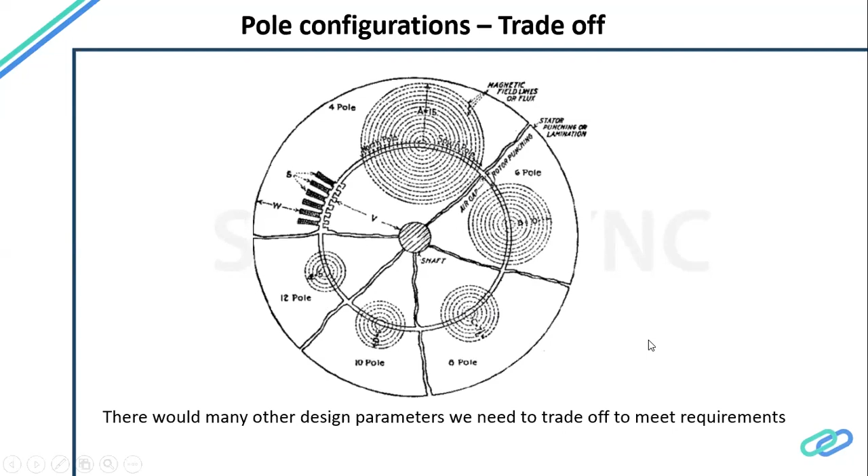This is another area: 6 pole, 8 pole. There are a lot of debates on 10 pole versus 6 pole versus 8 pole. Mostly you will see a machine will be either 6, 8, or 10 pole, because they fall in a sweet spot, or a golden mean area where the switching frequencies and the size of the machine, the OD of the machine, shrinks as I increase the poles. This is a flux return path where you don't need so much steel on the outer, because the conduction is only on a smaller portion of it. So these are all the trade-offs, the design choices, that we have to ultimately make.

IPM, I'm considering IPM as a key player in this, so I'm just trying to focus here a little bit. This is very much famous, especially the interior permanent magnet, because of the saliency that it gives.

If you see the inductance of these two paths, called the D and Q axis, these two paths give different inductances to the flux, so the flux paths are like this. Whereas if you see the surface mount permanent magnet machine, they are pretty close - the inductance of D and the inductance of Q are almost the same, because permanent magnet permeability is close to air. So it sees almost LD equal to LQ.

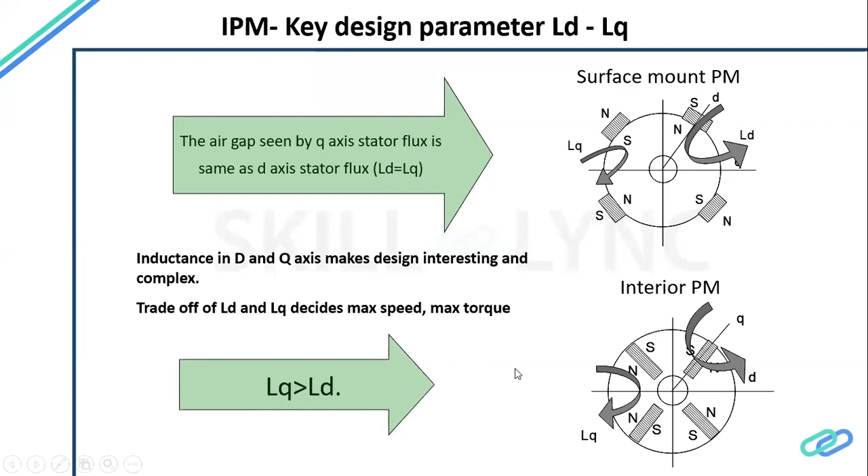But the real advantage of having this saliency, or non-equality of LD and LQ, gives additional torque, a surplus torque - that's the two parts, the reluctance torque and the synchronous torque. The reluctance torque comes from the difference between LD and LQ, and that is where it becomes a more torque-dense design. So the torque density, if you compare with induction, this gives a very good amount of torque as compared to the given space, volume, and weight.

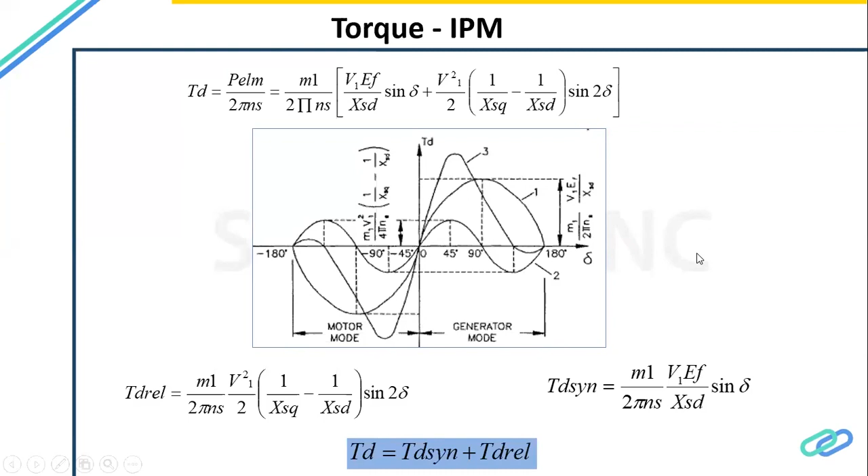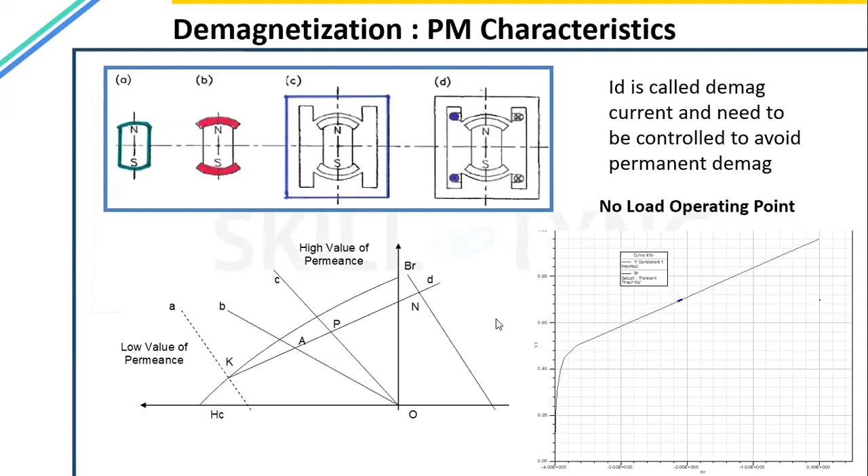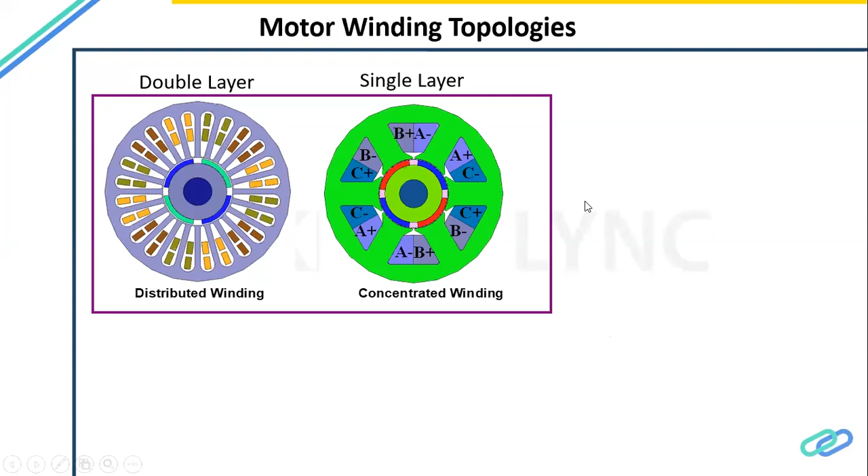Another thing is what kind of winding we should use - single layer, double layer, concentrated, distributed. There are many options available that we have to consider in machine design. The another trending winding is hairpin, where we have better thermal management, manufacturability, better winding factor, space factor - better utilization of space, and much higher fill factor.

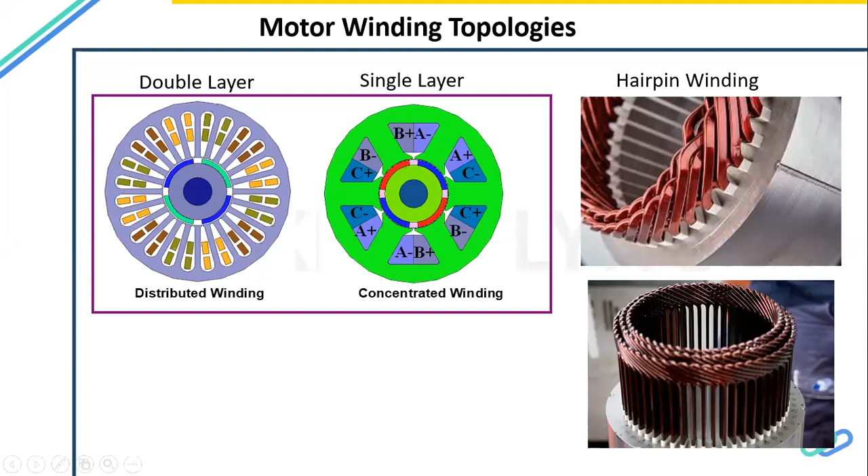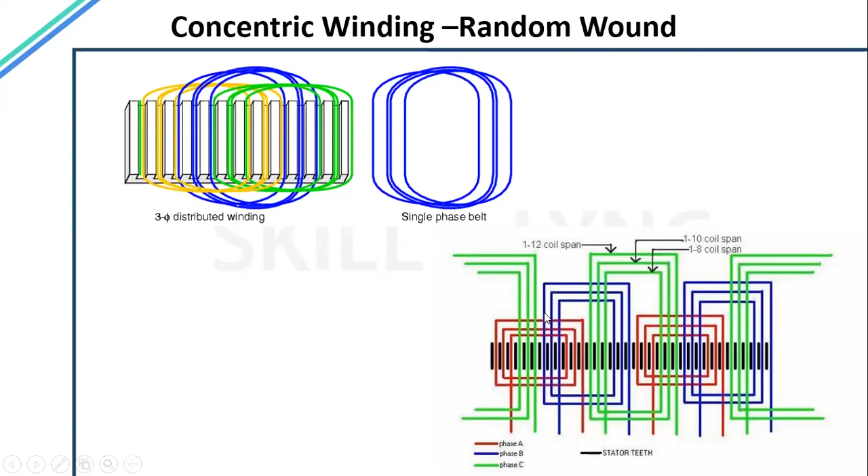We call this a random winding, this usual conventional type, versus a hairpin winding. It gives a lot of benefits, but it can be expensive if we don't have enough volume to handle this. If you see this kind of typical conventional winding, they are wound like this - the three-phase distribution typical. They are wound with different topologies like overlap winding, non-overlap winding, or alternate tooth winding.

There are different fractional slot windings available. We'll run through when we should have fractional slot winding, when we should select which winding, which windings are more appropriate for a particular application. These are all the options, or what I'm trying to project here is the whole design space available for us, the parameters we can play with when we design.

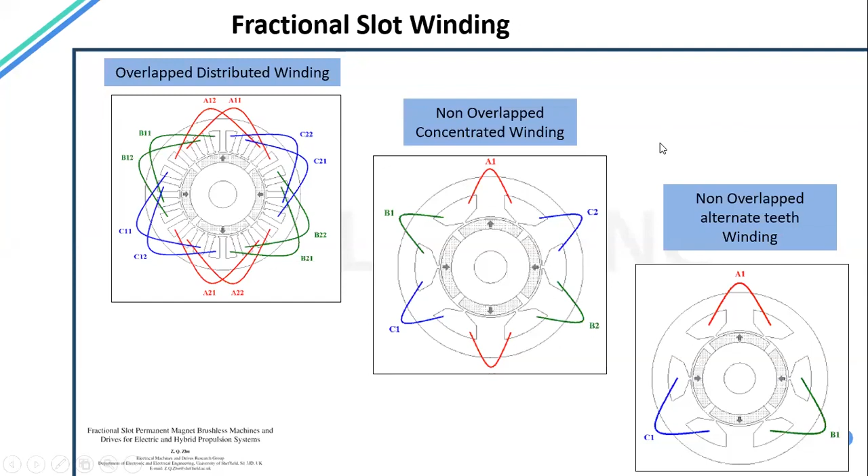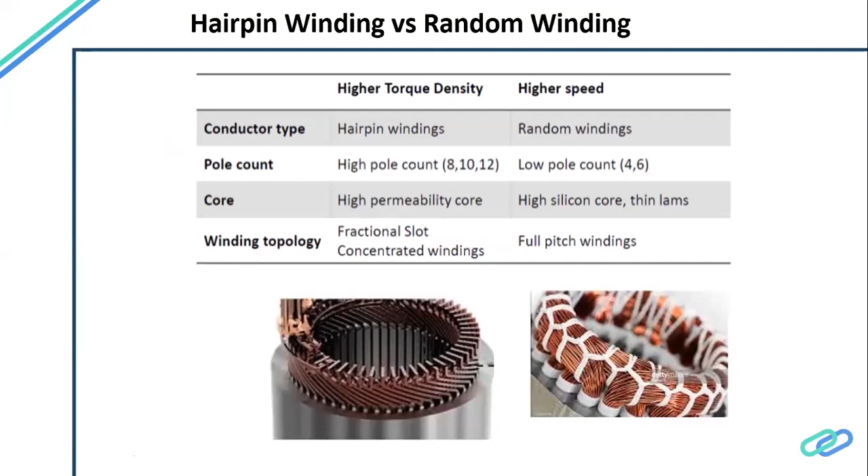So hairpin winding versus conventional winding: they give us very good torque density and very good thermal performance. Right now they are predominantly used in research, and that's where the market is going. There is very small volume currently, but we can definitely switch from one winding to another, back and forth. We'd have to redesign those, but thermally it is better to manage this kind of winding than random windings. We will take this up as a topic for further detailed discussion.

The other thing is harmonics, right? Once we have the magnets and windings selected, there's the air gap that we have.

The... hello? Sorry sir, sorry for the interruption sir.

No problem. So harmonics are a very key element, and personally I would push this as a key element that we always have to consider at various design phases. These harmonics either come from the inverter or from the design of the electric machine itself: the number of poles selected, number of slots selected, the winding topology selected, the way we have laid out our permanent magnets. All these geometry elements play an important role, because they will reduce our efficiency and reduce our torque, since they are all unintended.

So the fundamental is what we want. All the remaining harmonics contribute to losses, and those are very detrimental to the whole electric drive, or the vehicle as such, because there will be EMI/EMC issues. There are many bad effects of these harmonics, so we have to reduce all these impacts, or eliminate a few of them.

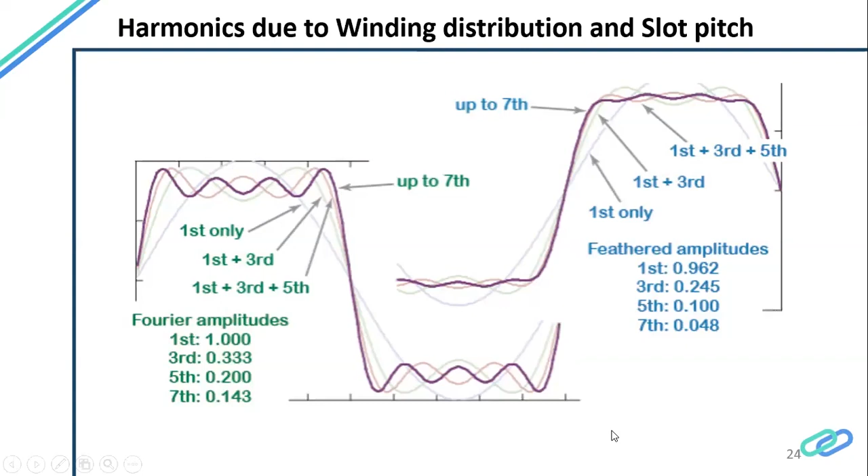So another element is... I think somebody is asking -- please don't ask me right now about the control, let me use the control. So there's the conventional wave winding, and there is some special winding here.

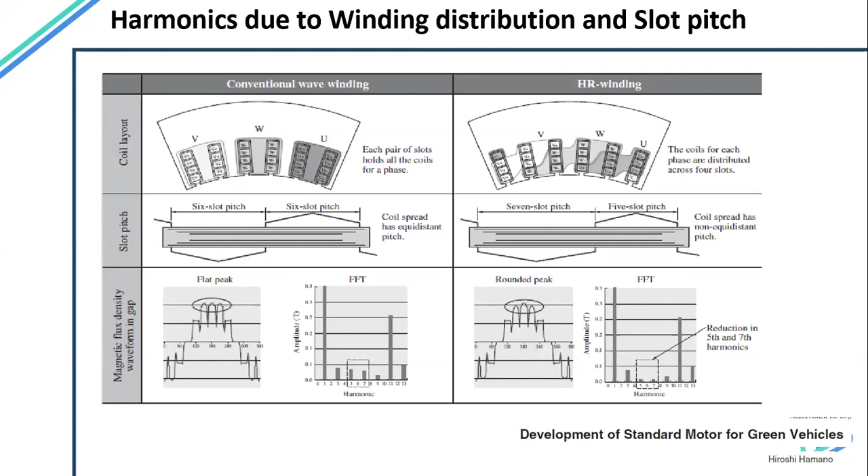You can see, if you do the FFT on this air gap flux density, some harmonics are reduced. If you compare these two harmonics here, you can see they're different -- the winding patterns give us reduction or elimination of harmonics, and this is where we will be focusing most of our time in our design.

The losses that any machine has can be categorized by and large into three to four areas: stator, rotor, friction/windage, and some shaft and housing losses. Mainly copper loss -- the predominant is copper loss, I-square-R loss -- and the iron loss.

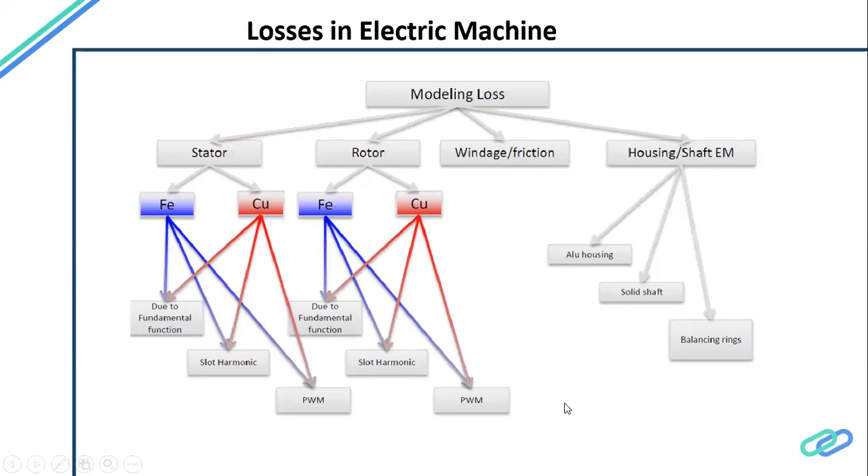These losses we need to keep in control when we design, especially when using PWM techniques. We have to be very careful what kind of other harmonics are getting injected into the machine, because they either produce negative torque, or produce I-square-R loss, or increase iron losses, since iron losses are very much driven by the frequencies we have. Higher harmonics, higher frequencies, and those losses will get impacted. So harmonics are at center stage when we talk about this.

If you switch from looking at losses to the efficiency side, it would look like this -- this is where designers, or whoever is using the machine, will be keen to look into this efficiency map, so called. This is torque, speed, and efficiency, and the challenge is where to optimize this machine in this area. As I mentioned, whatever the driving cycle requirements are, those are the elements we have to consider. This is the ideal I showed earlier, and this is something you may actually get when you test or simulate the machine.

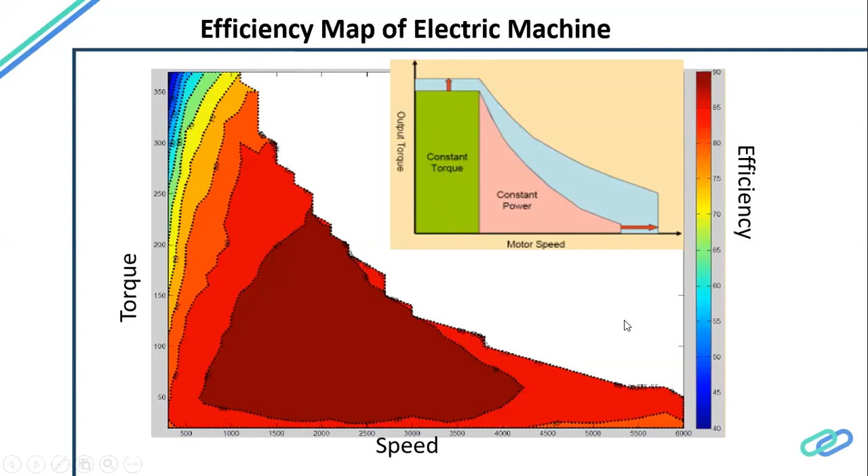Coming to the voltage perspective, here I have considered a 400-volt system. You can consider a 48-volt system, 60-volt system, 70-volt system, whatever, but there will be one range where it is fully operational, and there are some voltages where the machine won't work, or even the inverter won't work. We call those voltage stack-up studies, where we have to see which component supports the lower voltages -- whether it's the machine, the inverter, or the battery.

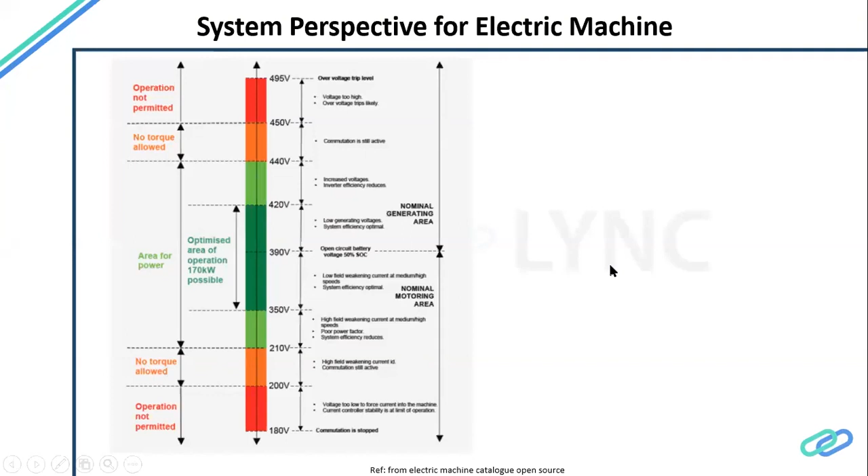You can see here regeneration starts in this area, motoring is in this area. So these voltages we have to lay down for our requirement, and we have to also say at what voltage level we have to stop the whole system or give protection to the system.

In a vehicle these voltages keep changing because the battery is not a constant voltage source as such. The voltage will keep on changing with SOC, with usage of the battery. So we have to make sure that at various operating conditions our machine is performing.

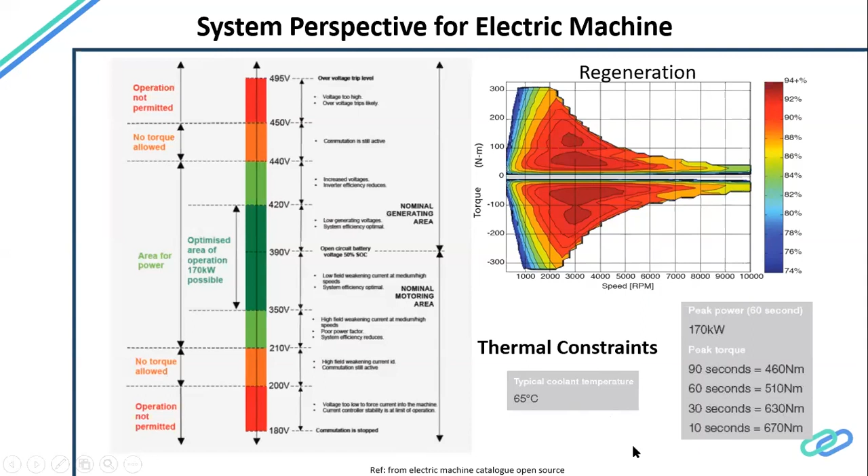The thermal cooling of electric machine is typically done through glycol plus water and glycol combination. There are separate radiators, say one dedicated maybe for machine and inverter, or there are different thermal circuits that we can discuss in deep dive sessions.

The end winding cooling is very important because they are all in air - we have very high thermal resistance in this area. So how to cool these? Whether we should have some dripping over here, or shaft cooling as we call it. These are all different studies we have to do: thermal resistances, conductivities, and governing equations we have to consider.

Mostly peak performance is governed by the limitation coming from the inverter, because the thermal mass of the electric machine is very high. So the thermal time constant is much higher for the electric machine.

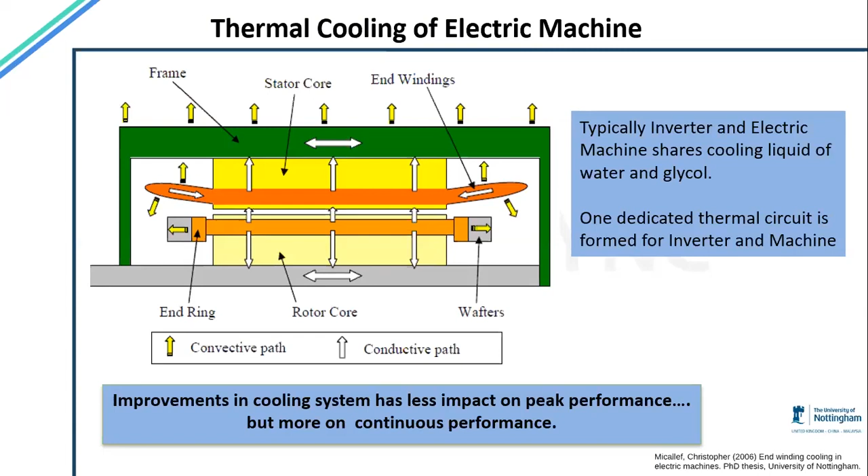It takes say 1 or 2 minutes to reach steady state, whereas the inverter will be in seconds - maybe in 10 seconds it reaches peak temperature. So inverter and machine, we have to consider these thermal constraints together.

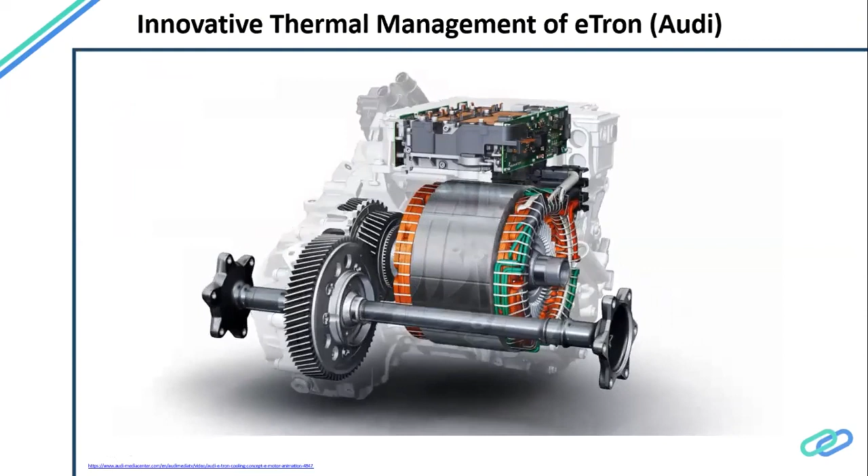You can see here one innovative thermal management introduced by Audi - a small animation you can also Google and get, this is an open forum. You can see how they have done the rotor cooling, which is the most difficult area to cool.

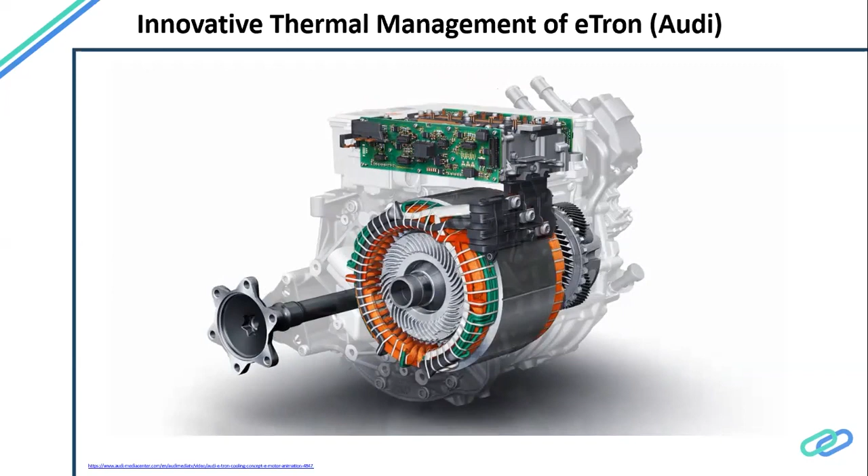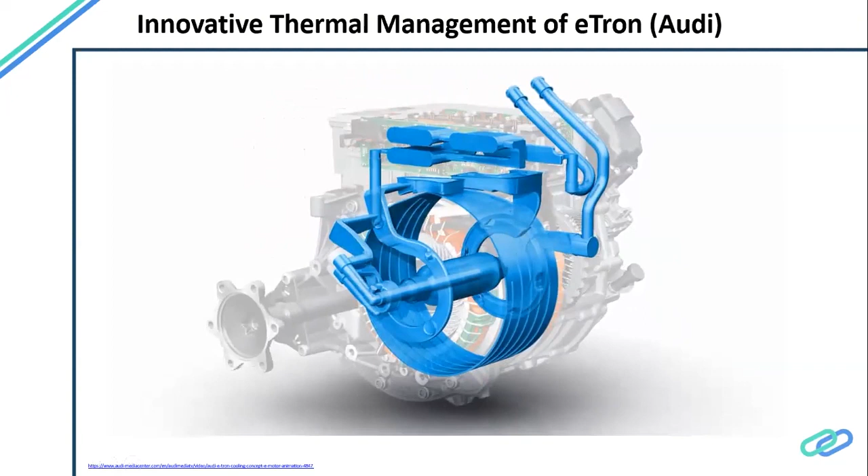So they have cooled it nicely. You can see the blue area is the stator, this outer, and inside you can see the rotor part. The coolant flow - how we define the flow of the fluid, and how they are entering, how they exit.

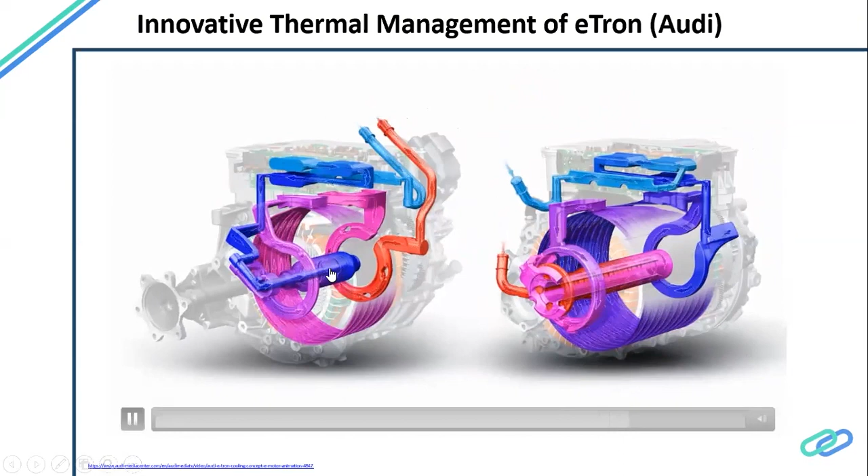This is one topology they studied, and they compared it with an improved topology where they split the entire flow between the stator and the rotor. In the single cooling case the rotor temperature shown in red is still hot, but here you can see the rotor is running pretty cool - that is the innovation, which they call eTron, introduced recently.

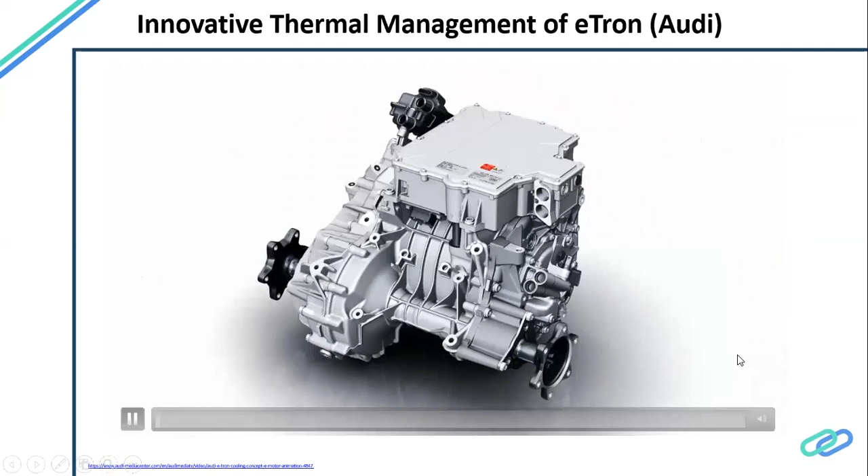Then comes the vibration part, the torque pulsation. There are various sources of vibration, so let us focus on the machine. The machine gives us a ripple torque, and that ripple torque is something we keep working on.

In case of induction machine there are different strategies, but for permanent magnet machine we give some skew angle to the permanent magnets, as you can see here. These skews will eliminate some of the cogging torque, some of the pulsation in the machine.

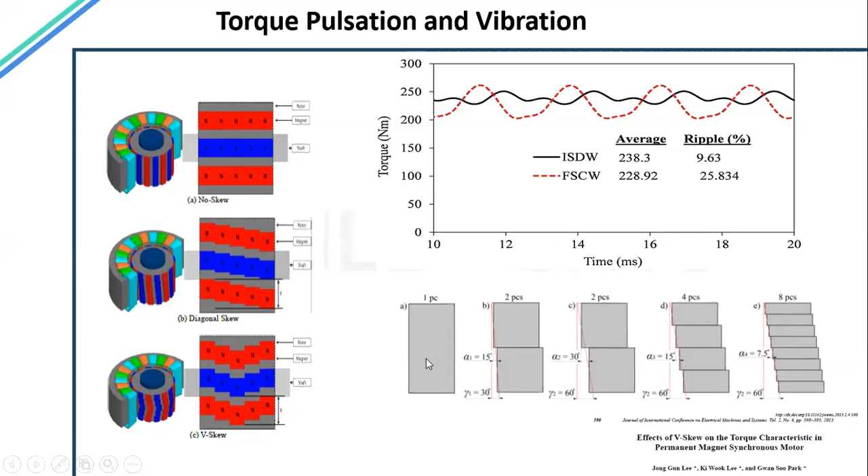These are typically measured in this alpha you have seen here. These are the different configurations - you can see, say 8 piece, 4 piece - so these magnets are arranged in different slices here.